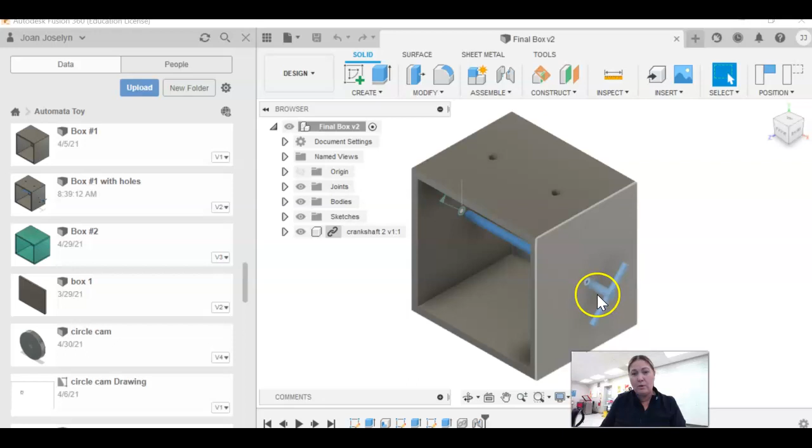This is Mrs. J, and today I want to put some cams onto our box assembly. You should already have a box with side holes, top holes, and a crankshaft that can move. If you right click and animate, it could move.

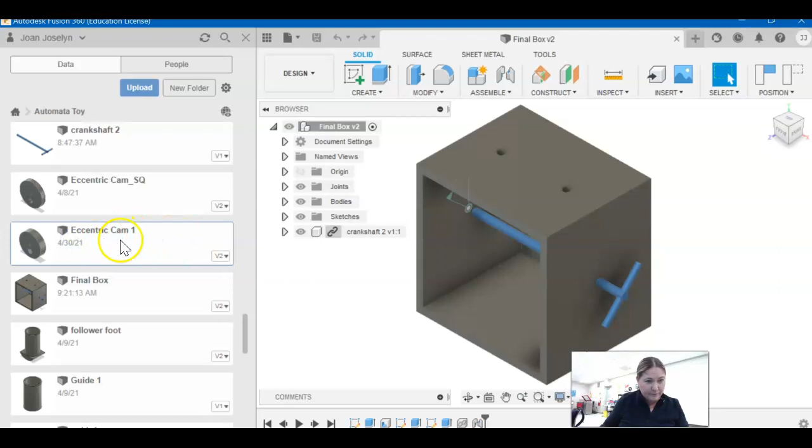Come over to your data panel, found by looking at that Rubik's Cube type feature, and find yourself a cam. I'm going to use eccentric, but you can use whatever makes you happy. You can always practice with this first and then switch to the one you want. So eccentric cam, and I'm just going to drag it in here.

I'm going to leave that there for a second and close my data panel so I have some space. I'll keep it highlighted instead of pressing enter or OK, and drag it out of the box. Our first instinct is generally to throw it right on there and use all these tools, but let's leave it where it is and let it go exactly where you want rather than manipulating it over and over.

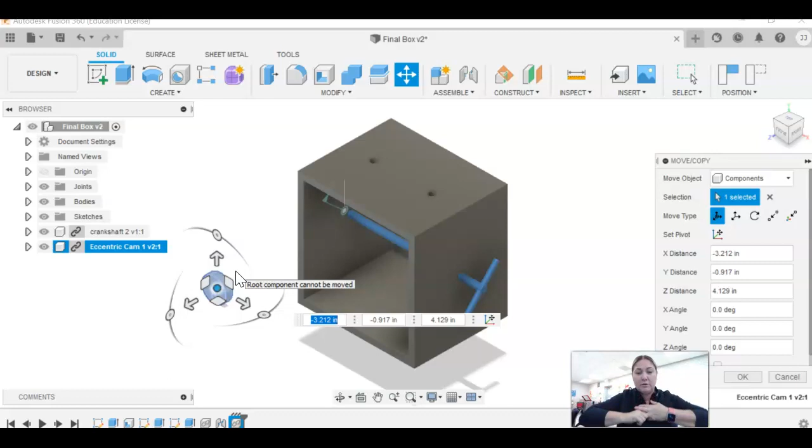Okay, so we have it here. I'm going to rotate it so it's in the right direction, because when it landed, the plane I built it on was in the wrong direction. Just rotate it so it's sitting perpendicular to your axis. Hit OK. It doesn't have to be perfect, just sort of in that sideways direction.

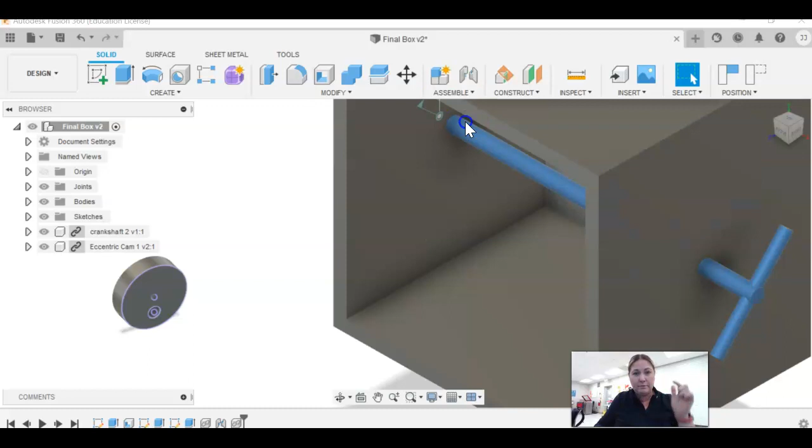So we're going to do the assemble tab, joint command, or J on your keyboard. We're going to zoom in a little bit. I want the center of the hole.

You have to see that little axis thing come up. See that right there? It's got the red, the green, the blue. You have to have that. Click that. You'll also see the cam gray out, meaning okay, you've clicked it. We know you clicked it.

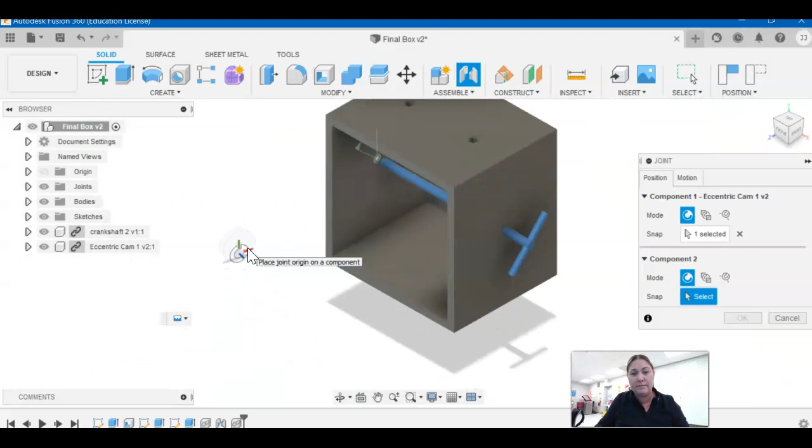So I'm going to zoom out, move over, and zoom back in. Sorry, I'm on a little tiny Chromebook, so I've got to move around. I'm going to click the edge of the axle here. It really doesn't matter where on that axle as long as you're in the center — it could be anywhere along there.

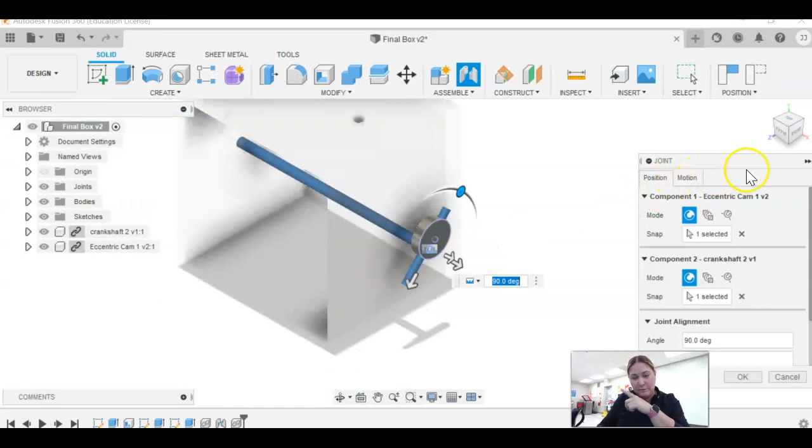Not quite done yet, so I'm keeping this open. Be careful not to hit enter because you still need to move — two things we need to do. Let's rotate. Hit escape. Be careful not to touch the box while you're rotating.

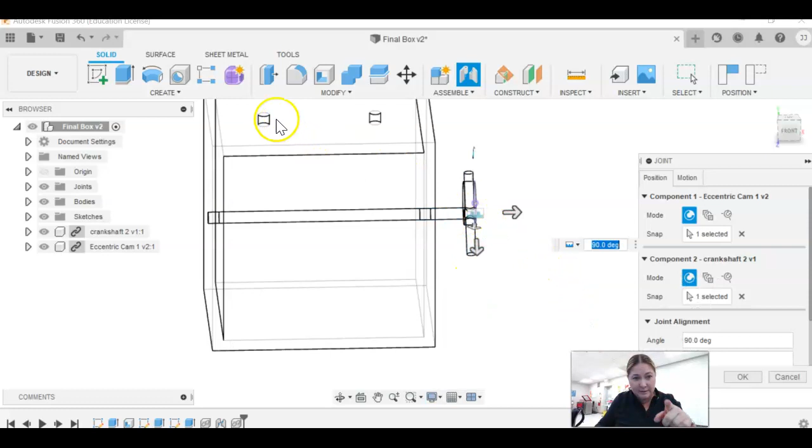I'm going to change my view. TV box at the bottom, display settings it's called. Change your visual style to wireframe — this will let me see where my holes are on the top a little better. Rotate a little bit up, and drag it a little bit down so it's in the video.

Okay, so I'm going to hit escape. I'm going to drag my arrow and just try to line that up right underneath there. You can be specific and type it in, or you can just drag it around. When you drag it, it sort of limits you to increments — so it went from 4.5 to 5.

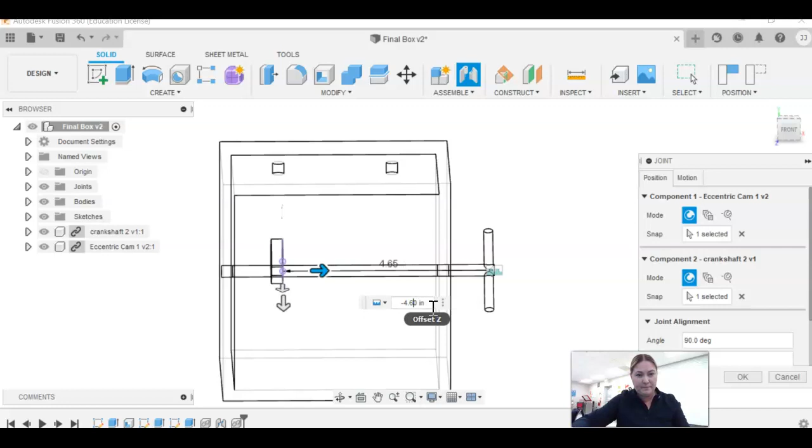So do whatever works for you so it looks like it's pretty much underneath. It doesn't need to be perfect, but you can line it up if you want to — that's good.

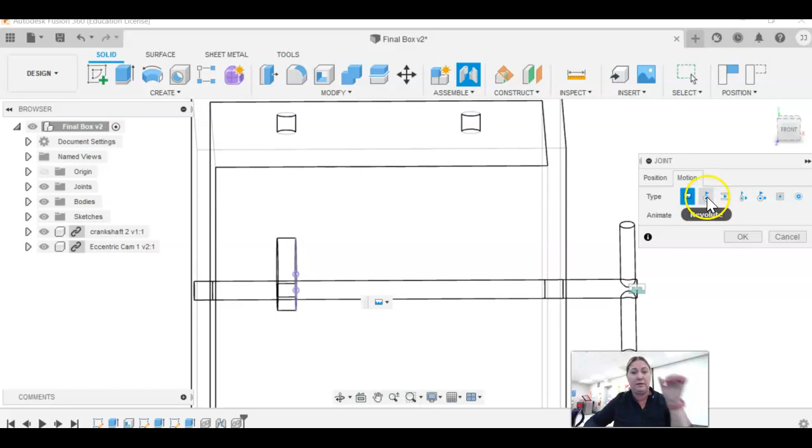Now I'm going to do two things before I hit enter, so wait on that. I'm going to hit motion and make sure that it's on rigid. You may have had it on Revolute from doing the crankshaft in the last video — it stays on whatever you used last, so you do have to come back and change it. Put it on rigid, and then click OK.

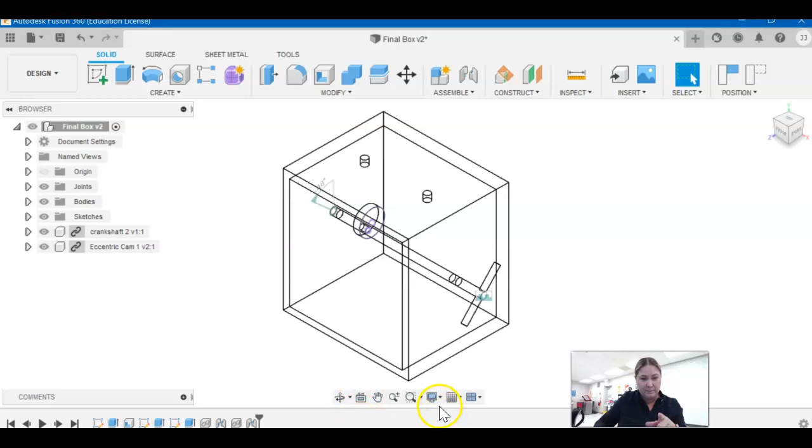So now I'm going to put it in home view so I can sort of see it. I'll go back to my regular visual style, shaded. You can use whatever visual style you like. And then let's get in here and animate the whole thing.

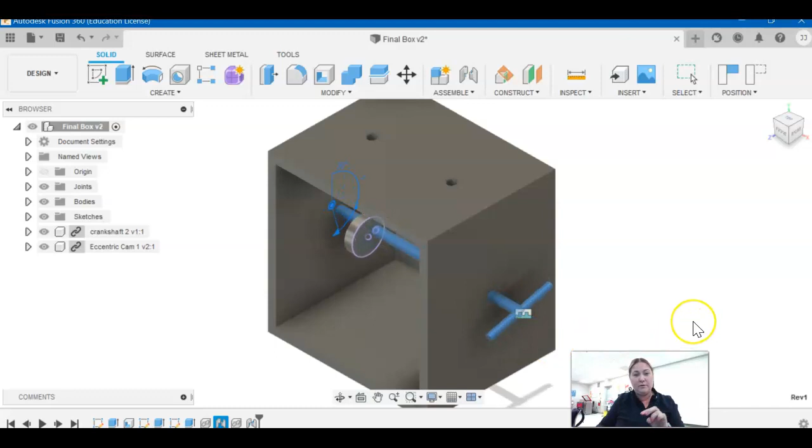Now you have to highlight that little angle over there, which means you're highlighting the joint, and you want to animate the model so you see the whole thing going around. If you didn't change that cam to rigid and left it on Revolute, it would still turn, but it wouldn't turn with the axis. It would do its own thing.

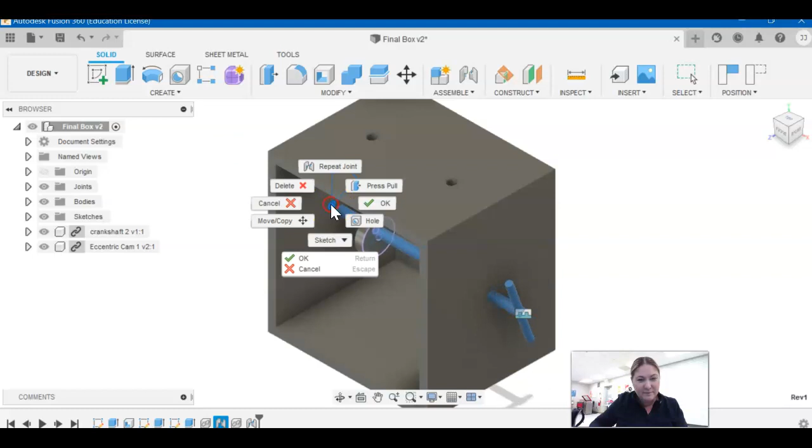Pretty neat, huh? To bring in another one, just repeat the same process. Let me see if I can stop this. Click OK. If you wanted to use two eccentric cams but didn't want them lined up exactly the same, because you want your models to move a little differently, you're going to pull that down. Let's take a look at that - this is kind of fun to do.

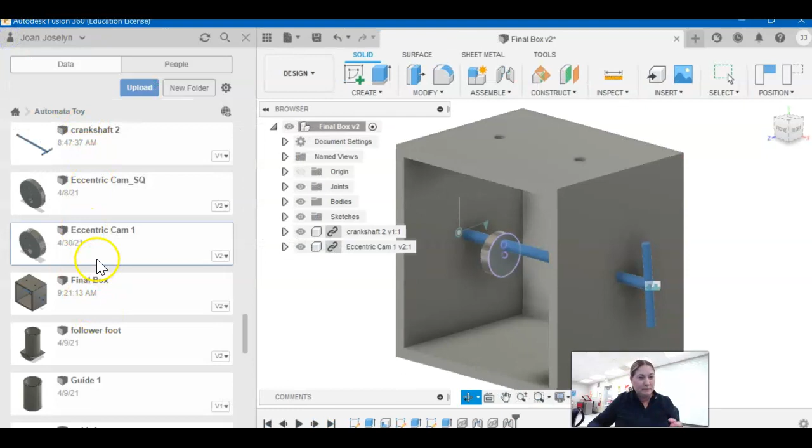Okay, data panel, bring in the same cam. There we go, close data panel so I have some space, drag it out. The only thing you have to do differently is rotate it.

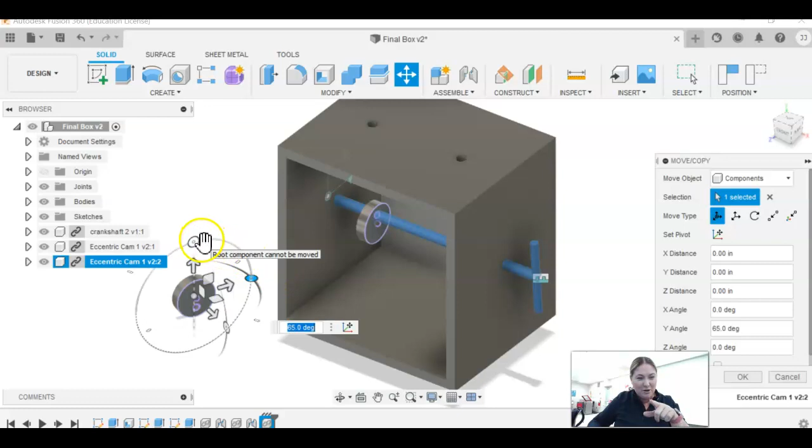Oh, I can't grab it. Okay, rotate it, but then I'd also rotate it on the top here, like around, so my hole's on the top instead of on the bottom. I'm going to click OK for a second because this one's there - now that's back on the bottom where it is.

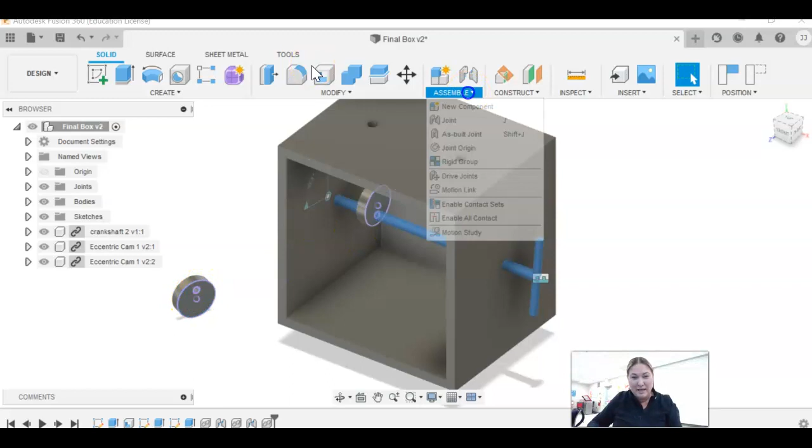Okay, let's do assemble, joint, and then zoom in here. Get the center right there, and then either pan or zoom out. Use your mouse wheel, try not to touch the box.

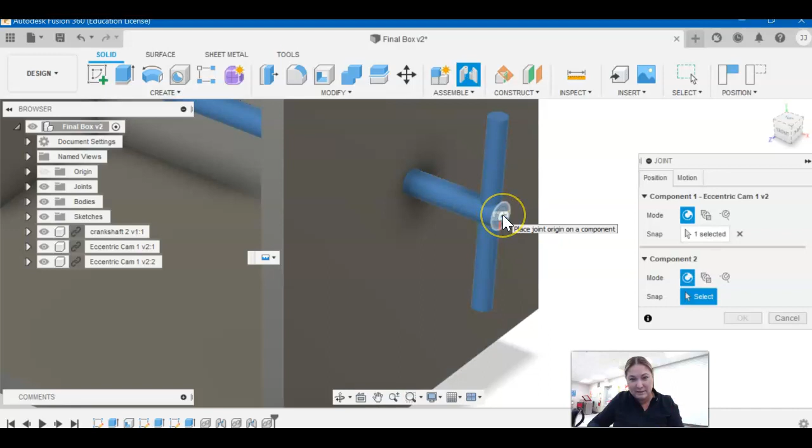I can because I'm in pan. I'm okay, hit escape once. And I want to click that center again. That joint command is going to be in the way - there's nothing to do about that, just leave that. Okay, so that's there.

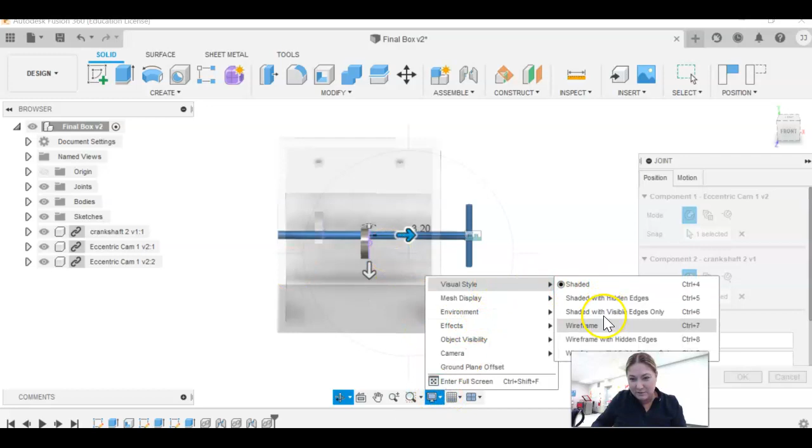I'm going to drag it along. I'm going to use the orbit tool to move so I don't grab my box on accident, and I'm going to change my display setting back to wireframe so I can see a little better. So get to the shortcut of these guys down below here, and that will save you a lot of headaches.

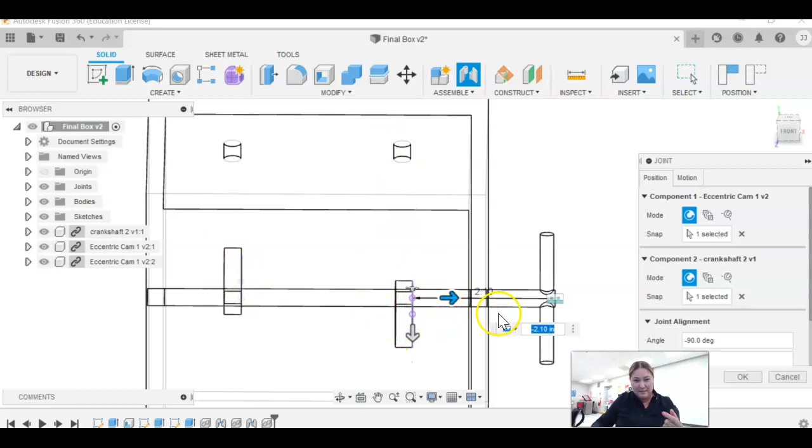Okay, so see how one's up, one's down? You don't have to do this, but it looks like a lot of fun. This one lined up nice and easy, so this one's up, this one's down. I'm going to make sure that I'm on rigid, which I am. My position is good, I'm going to click OK.

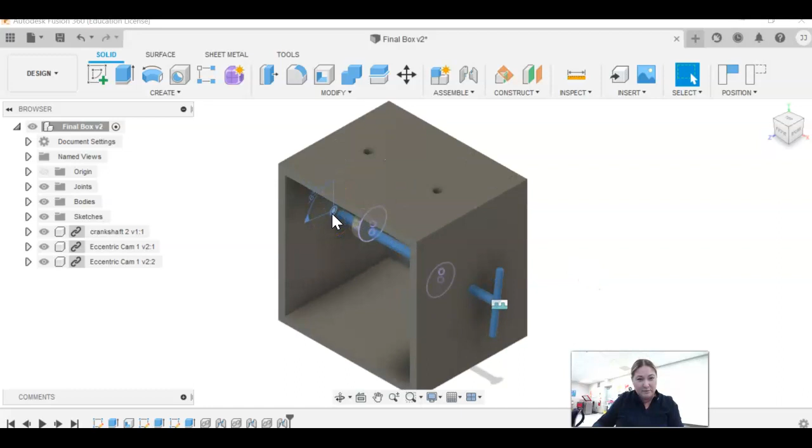So get out to your house here, isometric, and then go back to your visual style shaded, and we'll come back out. You have to - and this was driving me crazy before - make sure that the angle there is highlighted. That's how you get to right click on this, because otherwise it doesn't show up. Animate the model, not the joint. And I'll rotate a little bit - see how one's up, one's down?

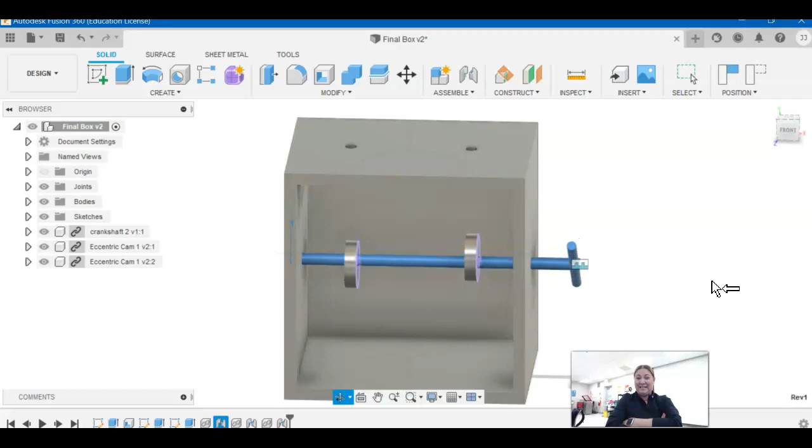That's pretty neat, huh? If you don't like the size of your cams, you can go back and change them, no problem at all. You just go back to the original file, open up your parameters box, change your nominal diameter to something a little bigger, and then when you come back here you just update. It'll have a little exclamation point with a triangle saying something needs to update, and you can change it without making new ones. Be done in a minute.